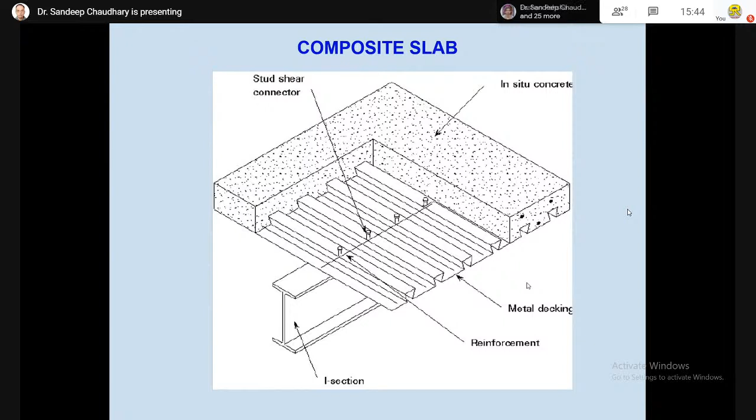Here again from another view, so we can have reinforcement also, as has been shown. In the metal decking, we can have the reinforcement. Of course, in this metal decking also, we can have certain arrangements so that there's a bit more shear connection, giving more bonding.

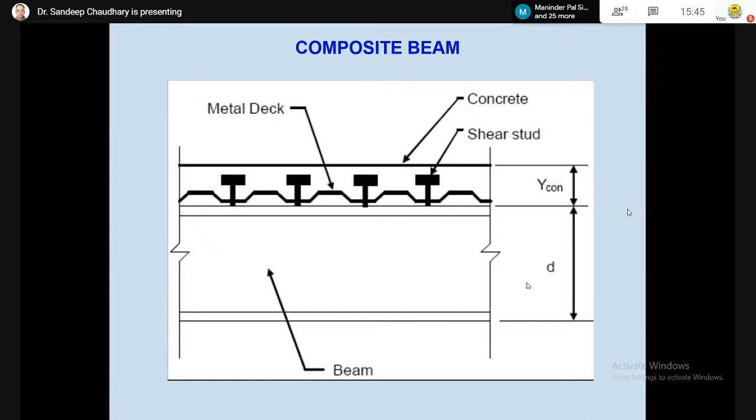So at these shear connectors, mostly called shear studs, they have a head here. The purpose of this head is that it doesn't allow the concrete to move away from the steel. It's a sort of locking arrangement. We'll be discussing that in detail later on.

We already discussed the advantages, so we're not going into that. One of the major disadvantages of composite construction is the shear connector installation. They're not conventional material - the material of this shear connector is not conventional steel. It's high strength steel, whereas conventional steel has a strength of about 250 Newton per mm square. The strength of these shear connectors is mostly more than 500 Newton per mm square, and mostly they're patented items.

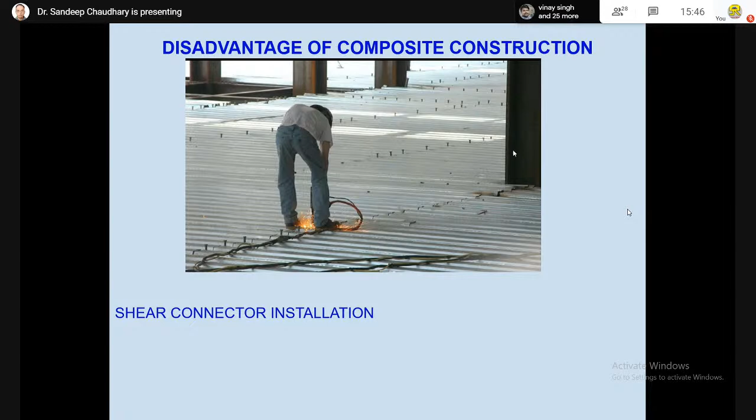The conventional welding methods also don't work here, so we need to have a separate arrangement for the welding methods.

Now this is a close-up of a composite metal decking, and you are seeing here there are certain deformed ribs. These ribs also have their own purpose - they ensure a bond between this metal deck and concrete slab. So at certain points of time, these metal decks with ribs are preferred, but in some construction sites, metal decks without ribs are also considered. They are just giving a bond which is over and above our analysis part.

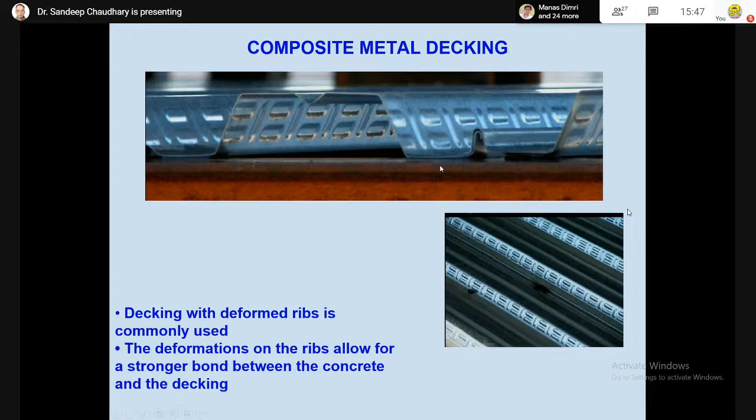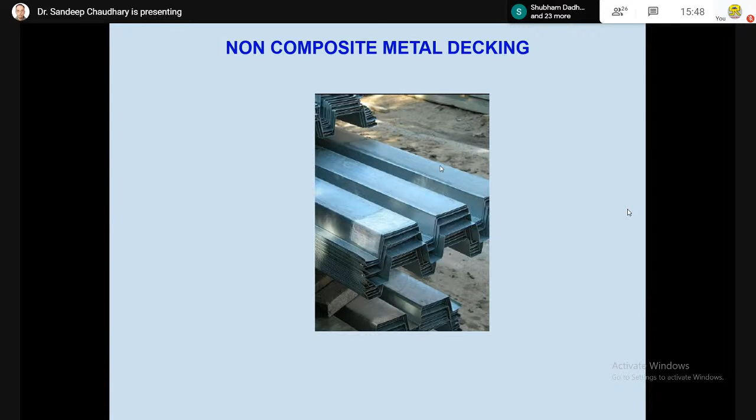So they are also sometimes called non-composite metal decking. Composite here doesn't mean the composite action between the structural steel and the concrete slab. For this definition, in this nomenclature, composite means the composite action between the profiled sheet and the concrete slab only. It is nowhere defining the complete composite action of the section.

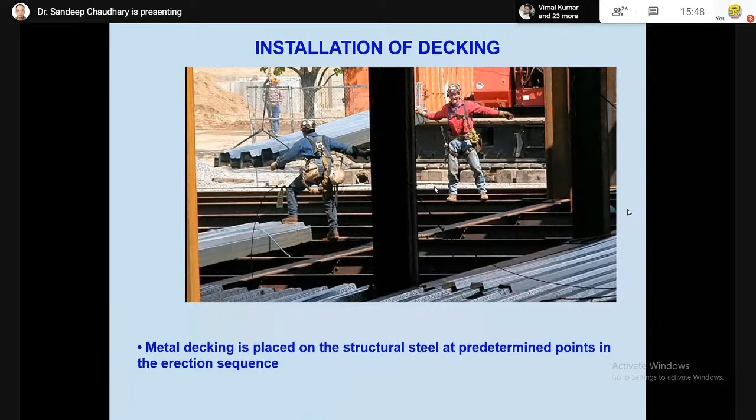Of course, it is not that their size, grade, or geometry is random. Standard codal provisions define what should be the H by D ratio - the ratio between height and diameter - what should be the maximum diameter, what should be the maximum height, and what should be the spacing between the shear connectors, both the transverse spacing and the longitudinal spacing of the shear connector.

The most popular type of shear connectors available in the market are called Nelson shear studs. Typically, their standard size is 19 mm diameter and 90 mm to 100 mm height. They create a strong bond between the steel beam and concrete floor slab.

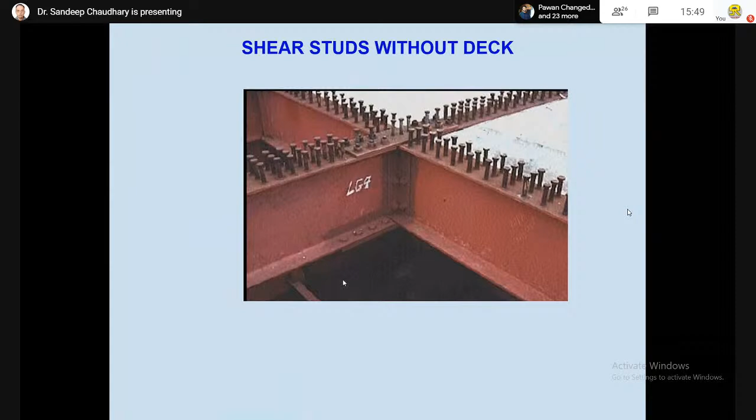So here you can see a lot of shear connectors placed very near to each other. The placement of concrete here is also an art - you have to put the concrete in a particular manner. The reason is simple: until the concrete attains its strength, the structure is not a composite structure, it is just a steel girder.

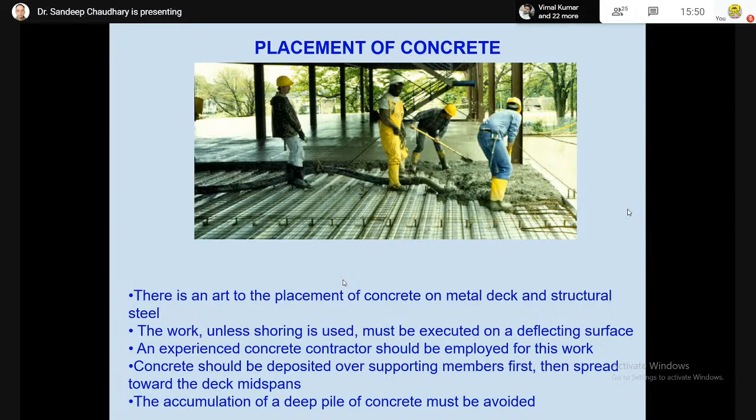If you apply a load on the bare steel girder, there will be permanent deformations due to that. So you have to apply the load in a particular fashion so that initial deformations in the bare steel girders are minimum. There are certain guidelines that the construction joint should be located over the beam or girder webs, and mid-span shoring should be placed.

There are two types of composite construction: shored construction and unshored construction. If you are going for unshored construction, the deflection will comprise of two parts: deflection due to the bare steel section and the deflection due to the composite section. Whereas if you are going for shored construction, the final deflection will be the deflection due to composite action only.

There are certain quality checks also which are specified in different codes, like you can weld two sample studs, and you can perform a bending test. We'll be considering that in the next presentation.

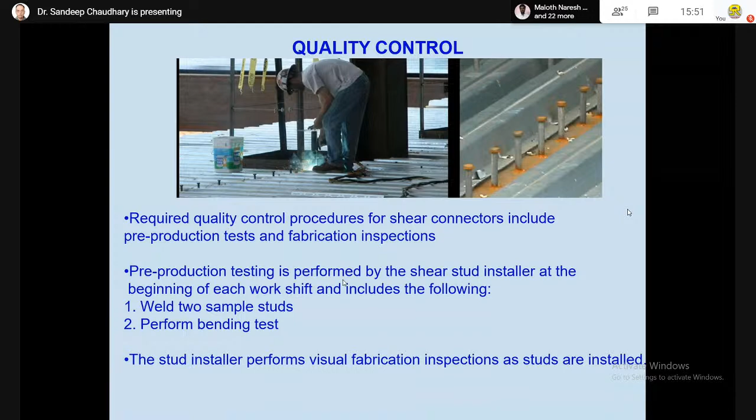The scheduling of composite construction is also very important, because until the structural members become composite members, it depends a lot. The deflection depends a lot on the manner in which you are going to apply the load on bare steel sections. So that's also quite important, and we need to look into that meticulously.

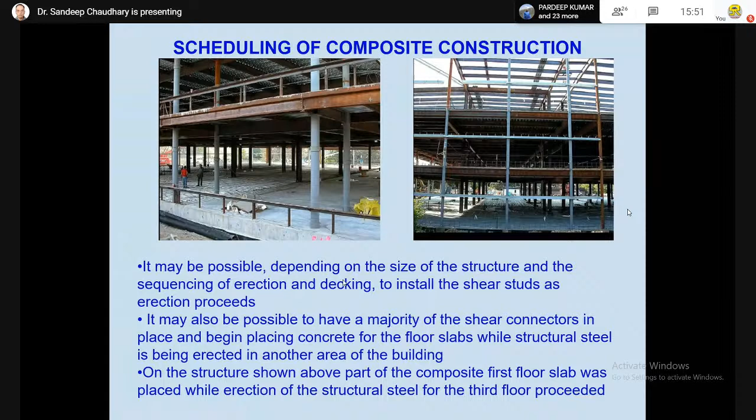Another interesting part of composite construction is cambering. It is more or less related to pre-stressing in concrete. In cambering, after the load, there's going to be certain deflection, and the steel girders are going to bend in a certain direction. So as we do in pre-stressing, the same can be done in cambering: we can provide a deflection or curvature in the opposite direction to that in which we expect the final deflections.

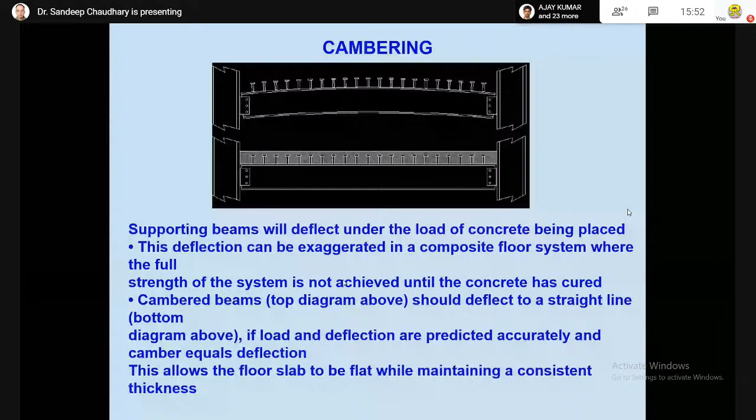This cambering can be done for a certain percentage of dead load deflection, full dead load deflection, or full dead load deflection plus certain percentage of live load deflection. The philosophy is the same as for pre-stressing, but there are certain disadvantages of cambering also, since it's not as simple as it looks in photographs or on slides. There's a certain complexity involved in detailing, fabrication, and fit-up associated with moment connections, and mostly we should not use cambers in moment connected beams.

Beams with simple framing connections may be cambered because the end rotational resistance there is quite small as compared to that of moment connection.

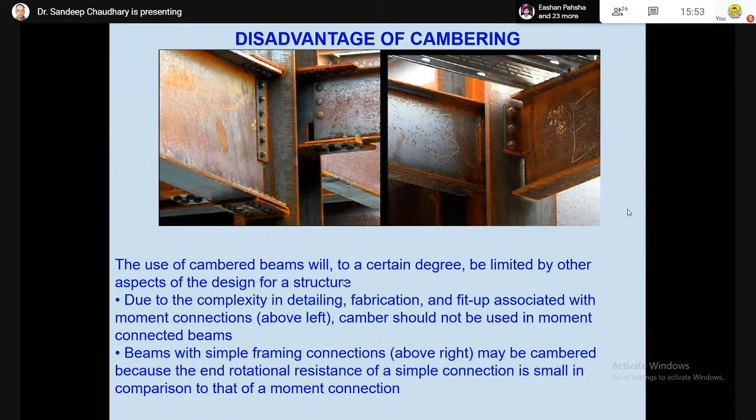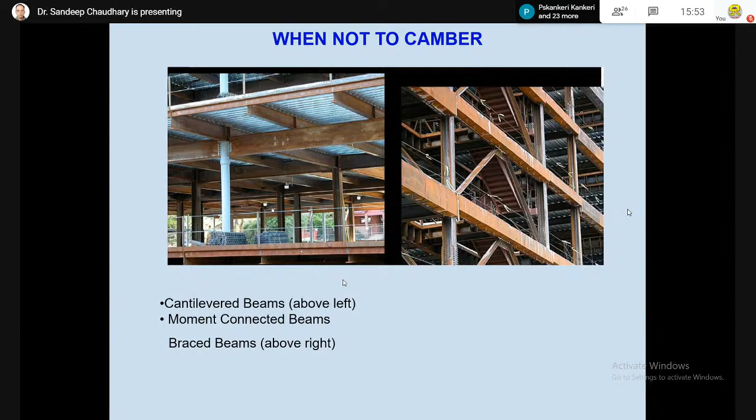The next question is when to camber. We can camber girder beams, members with uniform cross sections, filler beams, or composite floor beams. When should we not camber? Cantilevered beams should not be cambered, moment connected beams should not be cambered, and braced beams also should not be cambered. As we are very particular in pre-stressing of concrete beams, going for it in certain situations only, the same needs to be done for composite construction.

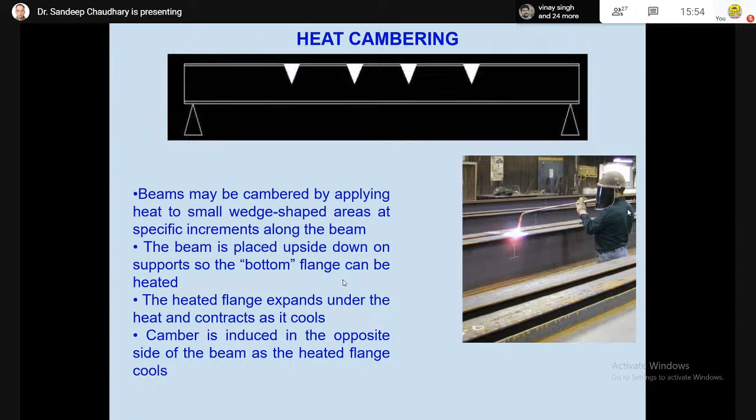You are seeing that the part which was heated is on the downside. During the camber, it was on the upper side because it was put in upside down manner. But finally it's going to be on the lower side, and that is a concave-down orientation.

Along with heat cambering, there's another option of cold cambering. These are more widely used and generally more economical than heat cambering. Here you have to mount the beams on a frame and then apply force from rams to bend the beam to create the cambers.

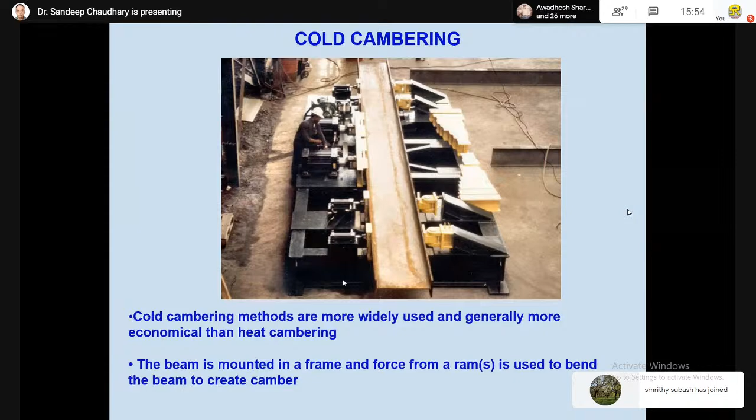Then there's a natural mill camber also, because when you'll be transporting the steel girders from the factory to the construction site, there will be a slight camber in the beam because it's taking the load of the beams lying on it.

So you can take into account or take advantage of that natural mill camber, but that should be at least 75% of the specified camber. Otherwise, you have to go for further cambering.

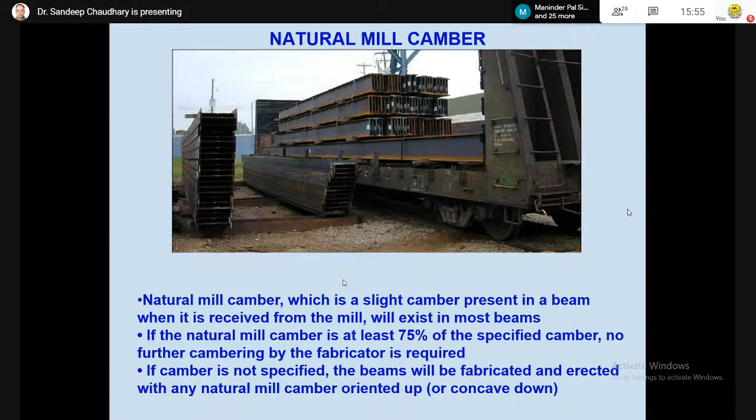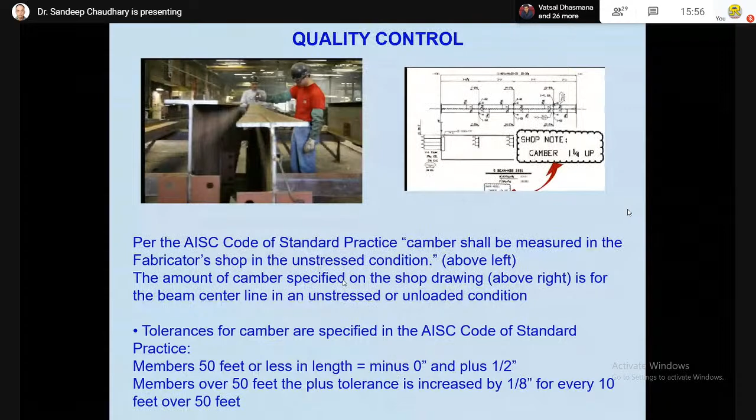It may be noted that Indian standards are still way behind the AISC Code of Standard Practice or Euro codes. Of course, recently certain codes have been introduced for composite construction, but that sort of detailing is still missing in Indian standards.

Then we have to see the cost of cambering also, and that has to be compared with the additional concrete due to ponding. What is this additional concrete due to ponding? Actually, if we do not do the initial cambering. Then when we'll be placing the concrete on the bare steel section, the steel will bend and that will cause a curvature in the concrete slab. That means the effective depth of the concrete which has to be filled on the slab will increase a little bit by the amount of deflection into that area. So that is called ponding, additional concrete due to ponding.

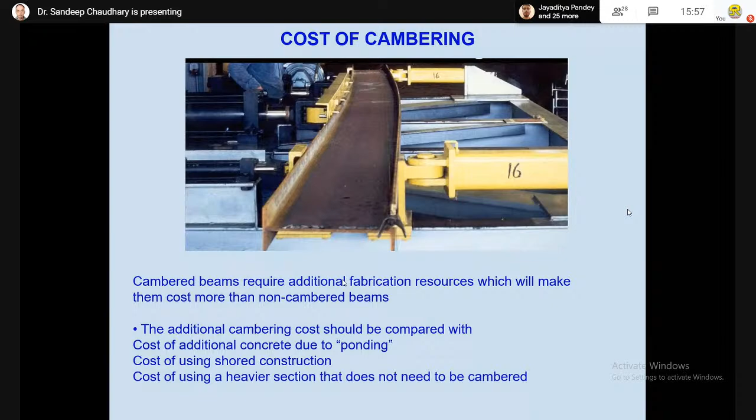So you have to see the additional concrete due to ponding versus the cost of using shored construction, versus the cost of using a heavier section that does not need to be cambered. And then you have to calculate and see which is beneficial for you. At times, it may happen that you can afford the ponding. At times, it may happen you can afford a shored construction. At times, it may happen that cambering is a cheaper option.

Now, just to get rid of all these problems which arise due to casting of concrete on site, that is in-situ casting of concrete, people have moved ahead and gone for the prefabricated concrete slab. So what's done in prefabricated concrete slab is we do have prefabricated concrete slabs of standard shapes and sizes.

The only issue is when we are going to place the prefabricated concrete slabs on the steel girders, there has to be a provision for the shear studs. We should have a certain provision for shear studs. So we have to have certain holes already for the shear studs in these precast slabs, or the precast slabs can be of such size that they just fit into that location only. And then the remaining portion of the holes, once these shear studs take their place in those holes, they have to be filled by non-shrink grout. So people are also going for composite beams with hollow core slabs.

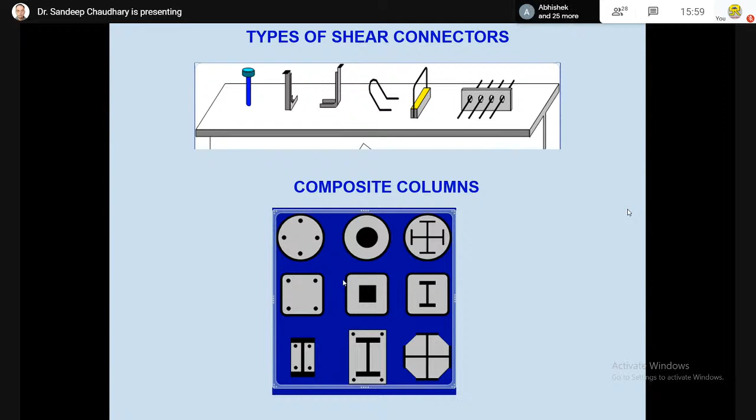And now there are different types of shear connectors. We'll come down to that again as I've discussed in another presentation. The most popular is the headed shear stud. Then you are seeing certain type of C-type shear studs, another type of shear studs. In all the shear studs, you will see that somehow effort has been made to ensure that there should not be a slippage between the steel girder and the concrete slab, that is, under shear, the steel girder and concrete slab should not move away.

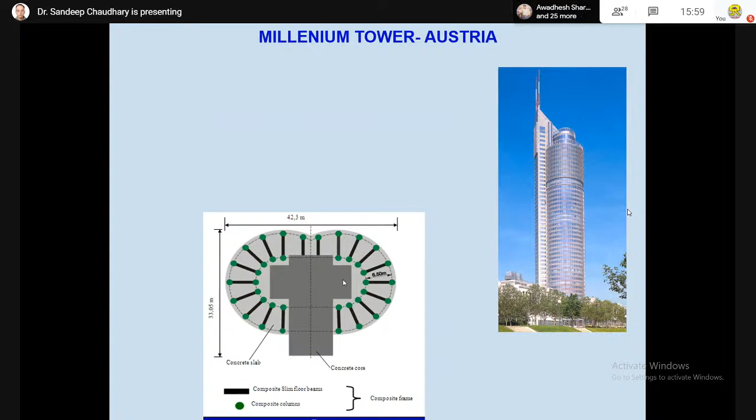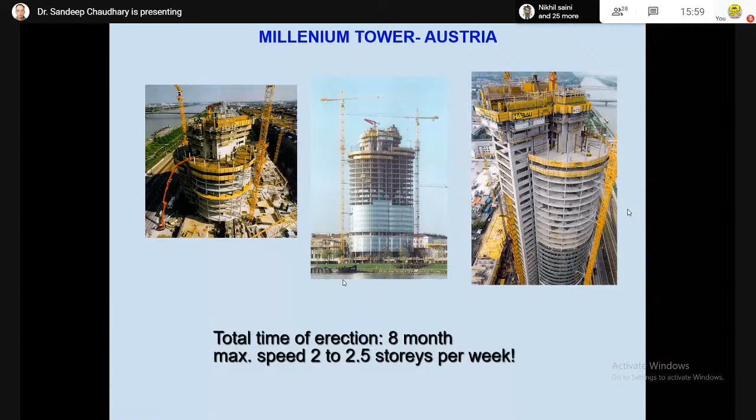Some of the classical examples of composite construction is Millennium Tower, Austria, a very big tower. It's a 55-story building, and what is important is that the time of erection was just 8 months. So if you use composite construction, then you can erect up to 55 stories in just 8 months. This is the importance of showing this slide. So the maximum speed was about 2 to 2.5 stories per week, which is almost impossible when we go with conventional concrete construction. That's why this composite construction is becoming popular.

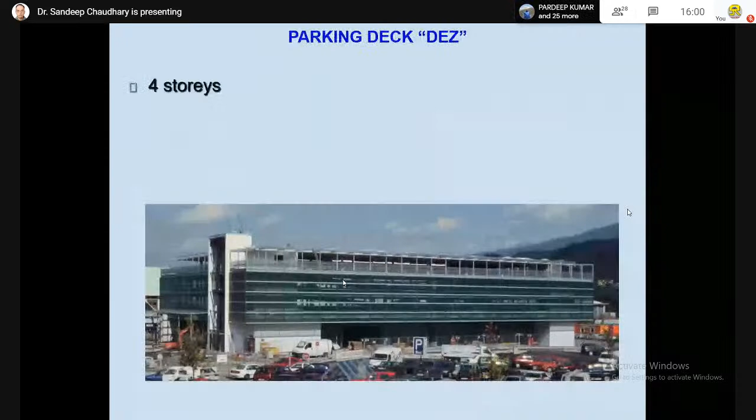Then another is Citibank, and then a parking deck. So different types of composite constructions are being used. Here, what is interesting is that there's erection of composite columns over 2 stories. These columns are composite columns in the sense that outside there's a steel section, but inside they're filled with concrete.

That's also an interesting method of going for composite construction. You can have a small thickness of prefabricated slab. The advantage with these prefabricated slabs is you get a platform for working on it, so you don't need shoring and you don't need scaffolding. The same prefabricated slab can be used for that purpose.

Here the headed stud size was 22 mm. The standard size worldwide is mostly 18 mm to 22 mm.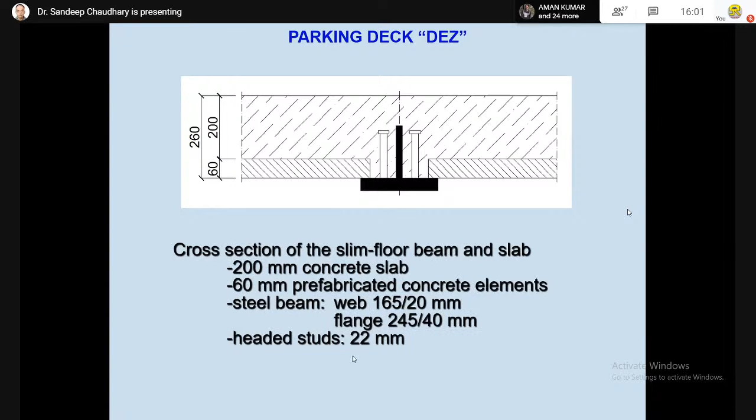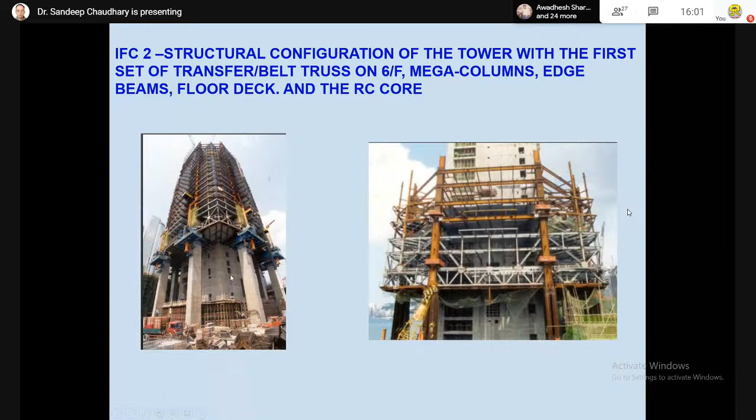So these are some other examples. You can see here another type of composite construction. Inside there's a concrete core, and then there are composite beams, and outside also there are concrete columns. This concrete core inside is connected through steel girders, which will be made composite with time with the outer core. So there's a connection of this steel frame to the inner core.

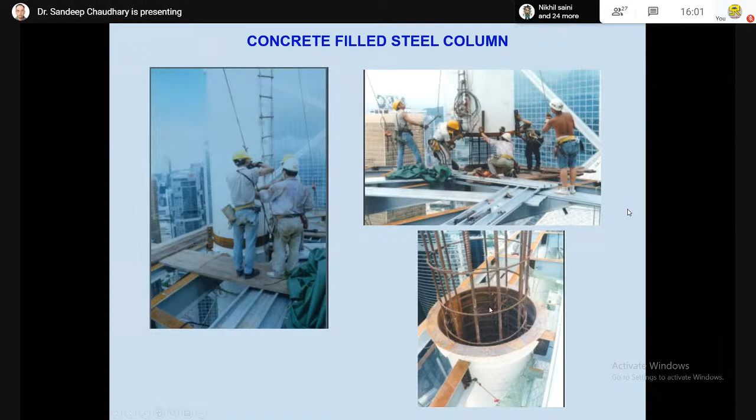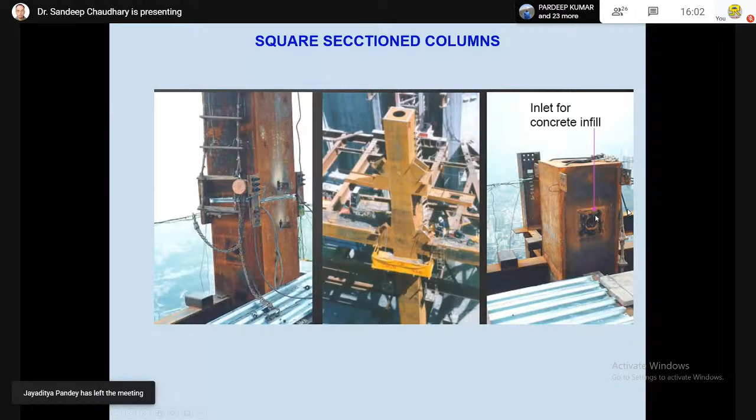This is another type of composite construction: concrete filled steel column. You can see these steel columns on the outside periphery, but inside it is filled by concrete. It is just the opposite of our conventional concrete type of columns. You can have squared section columns also. Here you can see there's an inlet for concrete fill. So again, this is a composite column construction.

You can see here there are a lot of shear studs protruding out, because when we cast the concrete around this, these shear studs will ensure good composite action between the steel section and concrete section. Of course, here it's for a column, but the purpose of shear connection is the same.

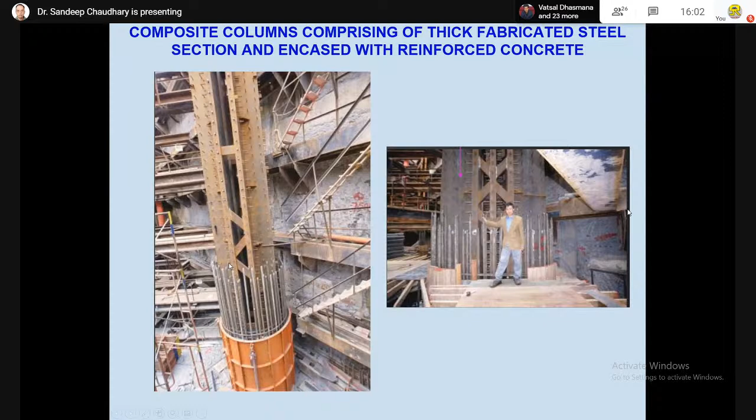So you can see here, inside we have a steel section, then we'll have concreting. A steel section embedded in a concrete column is again another type of composite section with a lot of shear studs. You can see a lot of shear studs here.

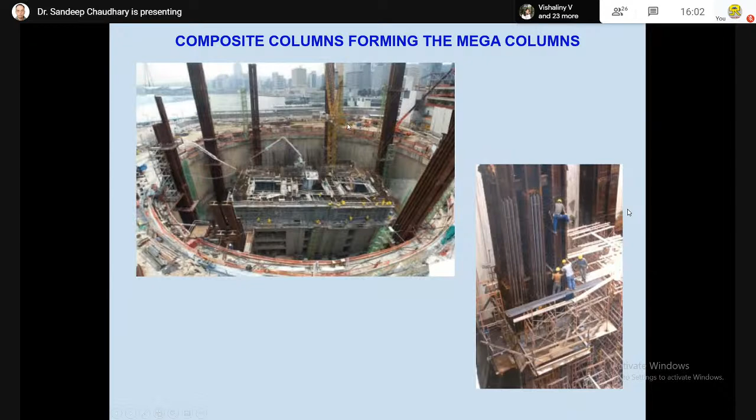Here these different composite columns, there are a lot of composite columns, they will form a mega column. You can see here we are embedding these composite columns in the core wall. So different types of composite constructions have been shown here.

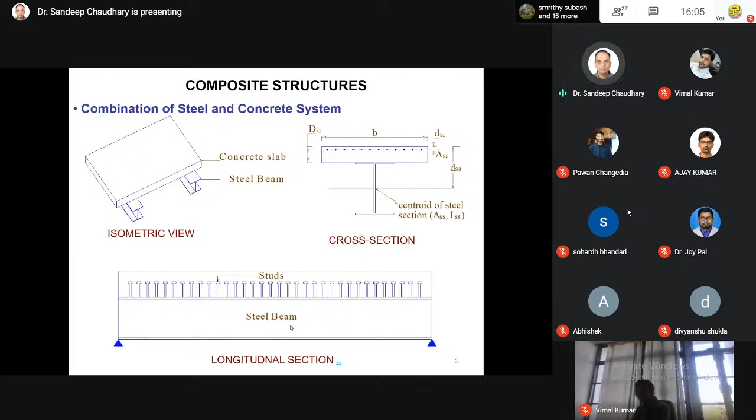So the tensile part will be taken care of by the steel beam, and the compressive portion will be taken by the concrete slab. To talk about service load behavior of such structures, it's not always the idealistic case.

If we go for continuous beams, then there will be certain hogging moments at the ends. In the portion of hogging moment, the reverse will happen: the upper portion will come in tension and the lower portion will come in compression. That means the concrete will now be subjected to tensile forces in the hogging moment region.

And if those tensile forces cause a tensile stress which is more than the tensile strength of the concrete, then the concrete is going to fail, and the cross section is going to become a simple steel cross section, because the concrete will fail. So if you see the sections longitudinally, the major portion will be a composite cross section, but in the hogging regions, the section may reduce to just a steel section because of higher tensile stresses.

Then there are certain time-dependent effects of creep and shrinkage which cause progressive cracking. So along with cracking, these creep and shrinkage effects add to the complexity of the behavior of composite structures.

On top of that, there's the flexibility and type of shear connections, because we cannot assume that the shear connections are so rigid that they'll always ensure 100% composite action. Ultimately these shear connections are also made of steel, and even if it is high grade steel, there's always going to be certain deformation in the steel section. So we cannot guarantee absolutely 100% composite action.

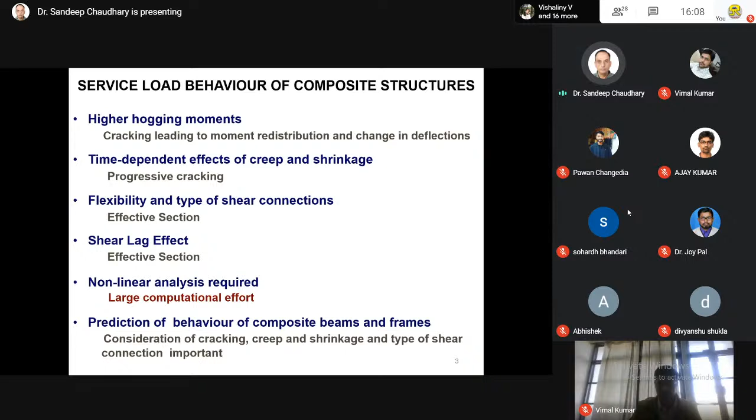So this leads us forcefully to nonlinear analysis. Of course, nonlinear analysis requires a large computational effort. And the prediction of behavior of composite beams and frames, to sum up this slide, becomes quite difficult because we have to consider cracking, creep, shrinkage, types of shear connections, etc.

For that, some time back, we tried to propose a hybrid procedure, which is analytical at elemental level and numerical at structural level, to avoid the complexities of finite element analysis. And also, we know that finite element analysis cannot be performed in day-to-day life by field engineers.

So just to give a simplified solution, we assumed to begin with that the shear connectors are completely rigid, and we tried to develop certain solutions which can take into account cracking, creep, shrinkage, and other aspects without considering the flexibility of the shear connector. We try to develop certain elements which are analytical at the elemental level and numerical at the structural level.

So what we try to do is split the total curvature into instantaneous curvature, and then instantaneous curvature was further split into instantaneous curvature due to moment and instantaneous curvature due to axial force.

Similarly, strain was split into instantaneous strain plus time-dependent strain. Then instantaneous strain was further split into instantaneous strain due to moment, instantaneous strain due to force, etc. So different small components were made for these time-dependent curvatures, strains, and stresses.

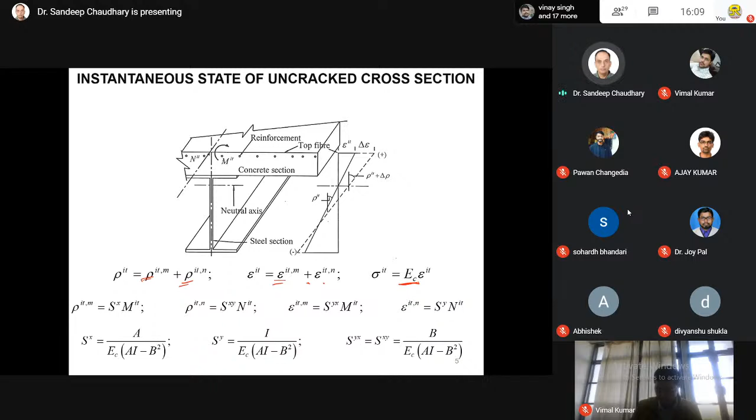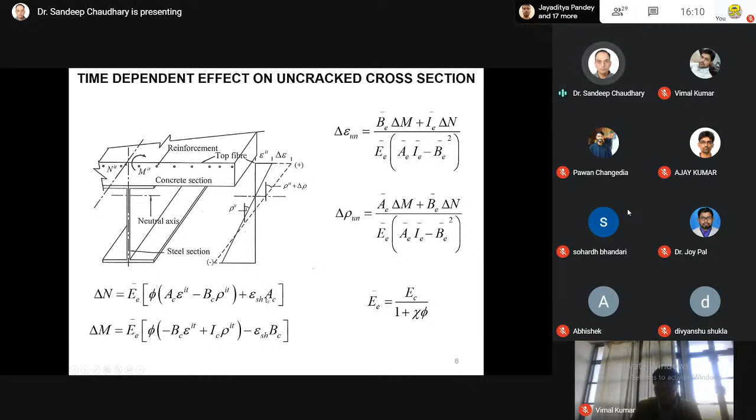At the elemental level, or rather at the cross-sectional level, we try to develop certain equations which can directly take into account the effect of creep and shrinkage. Here, phi denotes the effect of creep, phi is the creep coefficient, and epsilon sh denotes the shrinkage strain. So the formulation was developed and the analysis was done in two parts.

In the first part, instantaneous analysis was carried out. In the second part, time-dependent analysis was carried out.

Another interesting aspect when solving these composite structures is that it becomes an iterative procedure even at the instantaneous part. The reason is, initially you assume there is no cracking, but once you get certain moments, you will know some part of the concrete is going to crack. Then you have to carry out your analysis assuming those crack lengths. But once you go with those crack lengths, you will get another set of crack lengths after the complete analysis. So there's a lot of iteration involved in the instantaneous analysis.

And in time-dependent analysis, it so happens that these creep and shrinkage phenomena keep on changing the strains and the stresses in the sections.

That is, the crack lengths keep on changing as those portions where the tensile strength is lacking, the tensile stress keeps on changing and the crack lengths will keep on changing. So here, a cracked span length beam element along with closed form expressions was proposed. This is a typical span length beam element of a composite girder where the middle portion will be uncracked and the outer portions will be cracked.

So you have to find out, like say, if you talk about the stiffness of a normal flexural member, then we say 6EI upon L square, 12EI upon L cube, 4EI upon L, so on and so forth. But they are applicable only when EI is constant throughout the cross section. But here, unfortunately, EI is changing with the cross section along the longitudinal section. So different integrations have to be performed to find out the flexural stiffness of such cracked sections.

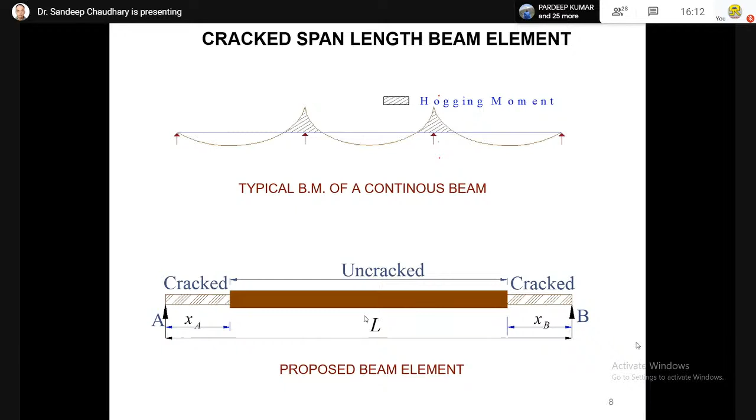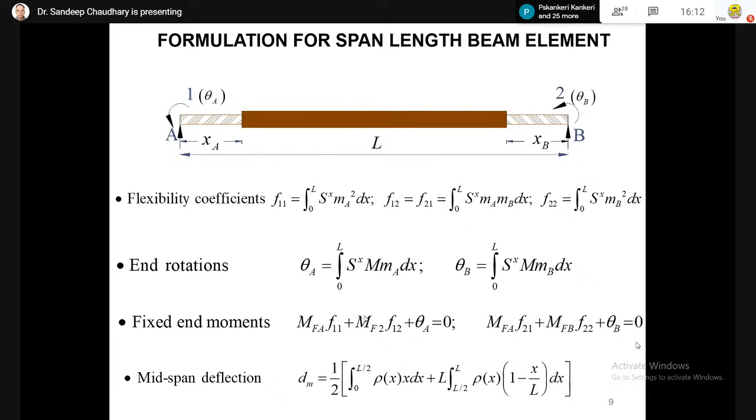So again, certain integrations were performed, and based on those crack lengths, we tried to develop certain flexibility coefficients and rotation, fixed end moments, and mid-span deflections.

Similarly, for time, you are seeing here with the time, the crack length will change. So different time intervals were considered, typically 20 time intervals. And we said that, of course, for a time interval, the crack length can be assumed to be constant. Of course, the crack length will change, or rather can change, at each and every moment of time. But to begin with, it was assumed.

Interestingly, if the crack lengths are changing, then the moment redistribution will take place, and again, new moments will be developed. So a complex history of moments has to be taken into account. So that was also considered.

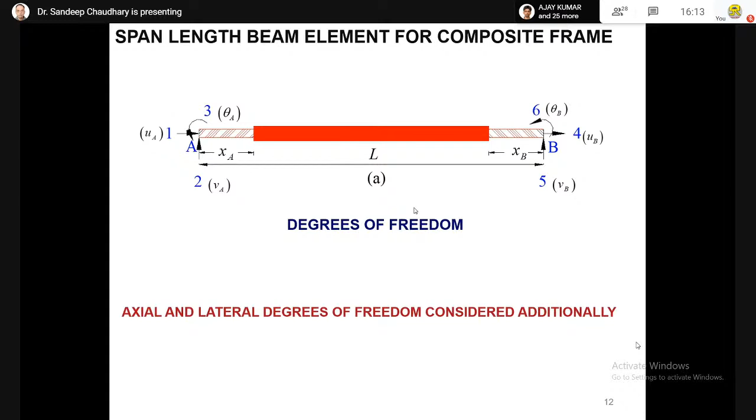And if you see a typical composite frame element, it will be a 6-degree frame element as compared to the composite beam element, which is a 2-degree frame element. So here, because if you're talking about frames, you have to consider axial and lateral degrees. So the process was extended there also. And of course, it becomes more complicated here because along with additional moments, additional axial forces are also developed.

The procedure was validated with the finite element software Abaqus. And we know that normally the computational effort required to solve any structure is roughly proportional to the square of the degrees of freedom. So if we solve such a type of composite frame by finite element software Abaqus, typically we'll need about 1500 degrees of freedom, whereas from the proposed procedure we'll need only 12 degrees of freedom.

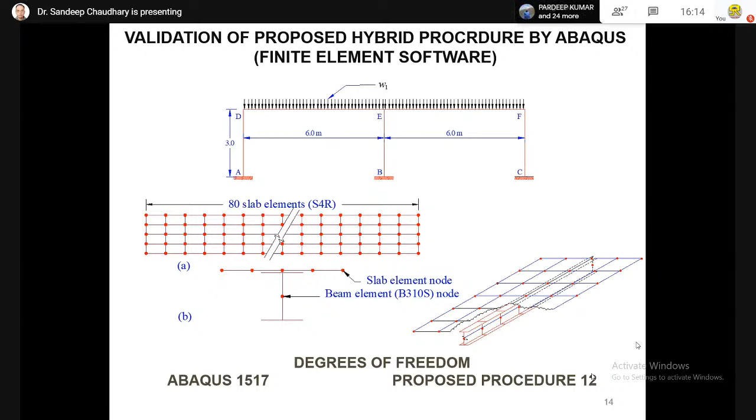So that's about a 100 times difference in the degrees of freedom. And if we convert that to computational effort, that goes up to 10,000 times. So you can reduce your computational effort by at least 1,000 times by going with this procedure, and you will get more or less the same results. And these are the validation results where we could match the experimental results.

Then this modification can be done later on for concrete girders also, concrete beams also, if you wish. Here you can consider the cracking in the middle portion also, and you can develop the flexibility coefficients, etc.

Coming down, then once we develop the complete knowledge of this, for composite structures with rigidly connected shear studs, we try to enter a new domain. That is, we try to see the effect of the flexibility of the shear connection. And not only that, we also try to introduce a new type of shear connection, an epoxy bonded connection. Let's see what we have done.

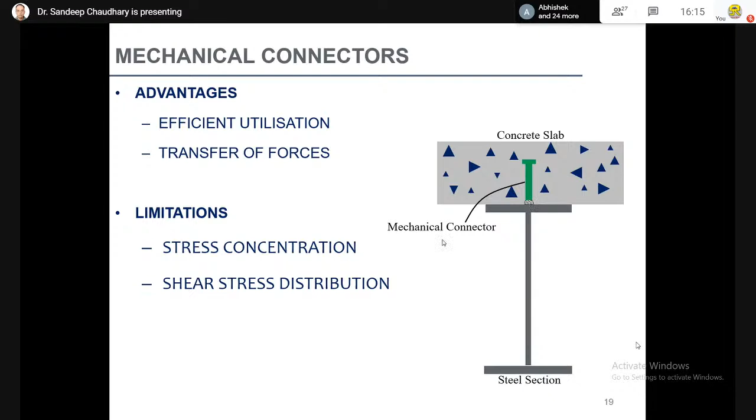If we talk about the mechanical connection, then a typical mechanical connector looks like this. The advantages are there's efficient utilization and there's a transfer of forces. Limitations are there is a cause of stress concentration because they will be at certain locations only, and the entire shear force will be concentrated at those locations. So there will be a stress concentration which can cause cracking of concrete, and of course, there will be a lot of shear stress distribution in those regions.

If we can somehow replace this mechanical connector with an adhesive bond, then we can overcome this limitation of stress concentration. So if we put a layer of structural adhesive here, it is more or less like putting a layer of gum or glue or Fevicol between two surfaces. Then there will be ease of construction, uniform stress transfer because you can put this adhesive layer all along the longitudinal section, and there will be quality assurance. Of course, there are certain limitations in that they can be susceptible to the environment because epoxies are normally susceptible to environment.

You have to also ensure the surface condition is very good. The reason is because when you use these epoxy adhesives, the thickness will be hardly 5mm, not even more than that. If there are undulations in your surfaces up to the range of 3 to 4mm or 5mm, then there is no purpose in using these adhesives because there will not be a proper bond. So that has to be ensured.

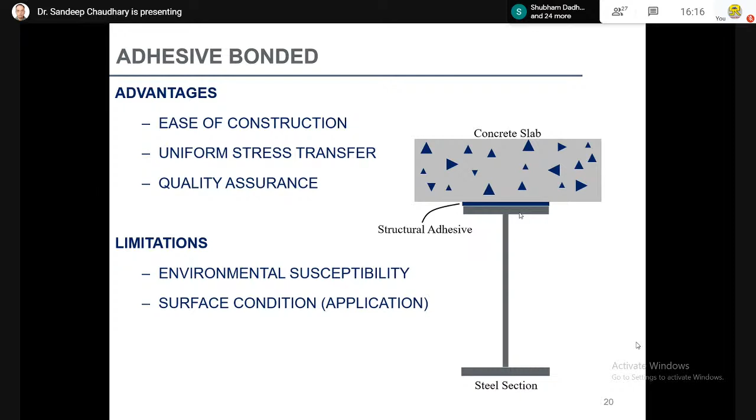This is the limitation. And of course, to check the strength of the shear connections, whether epoxy bonded or headed shear stud, there is a standard test called the push-out test arrangement, specified in Eurocode as well as Indian standard codes. What is done here is these concrete slabs are connected to the steel girder on both sides, with shear studs or shear connections on both sides.

Then a force is applied on this steel section, so it tries to move down, whereas the concrete slabs are firmly placed on the surface and restrain the steel section from moving down. That introduces shear stresses between the steel section and the concrete slab. The load at which the shear connection is not able to resist that shear stress or shear force, arising due to the movement of the steel girder through the concrete slabs, tells us the total load carrying capacity of the shear connections.

Of course, say you are using two shear connections and you have a load P, and the failure is at P load, then each shear connection will have a strength of P by 2 load. And if it's an epoxy adhesive bonding, then P divided by the bonded area will give us the epoxy strength.

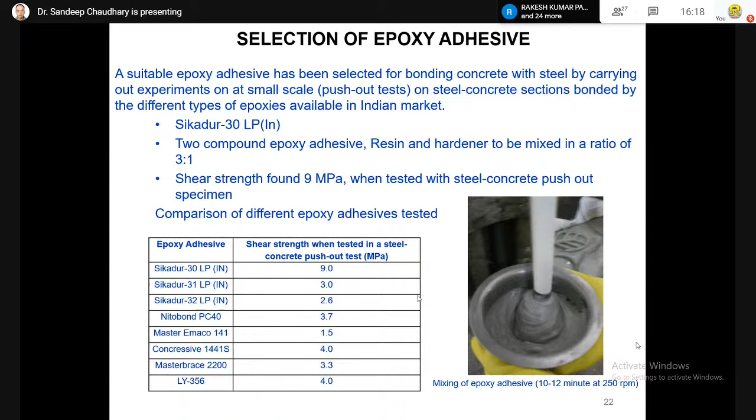Now to check the epoxy, what is very important is there's no standard epoxy as such available in the market for the composite action of structural steel and concrete slab. So a lot of epoxies were tried, different epoxies from different manufacturers, and even from the same manufacturer different varieties of epoxy. The shear strength was checked for different types of epoxies.

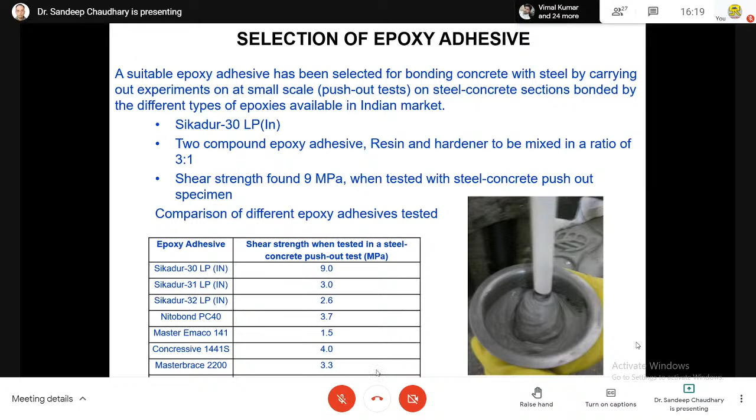Finally, we could freeze on one epoxy, Sikadur-30, which had a strength of 9 MPa. So we worked upon that epoxy later on. Of course, here the mixing process is also shown - you have to mix epoxy for 10 to 12 minutes at 250 RPM.

To go for an actual strength evaluation, to actually see what's happening, we installed a complete load frame, a full scale load frame. It was a movable load frame arrangement where, because a heavy load was about to come, we tried to cast a complete bridge. We used under-reamed piles also, made a load frame structure base, and a movable load frame was placed over there with loading arrangement to see what is happening actually at full scale.

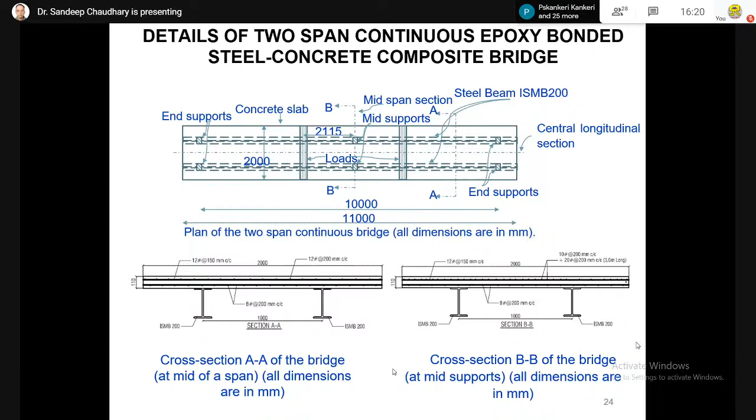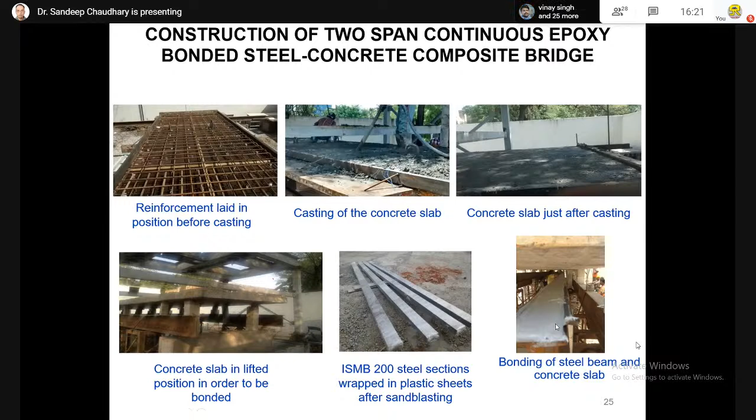In the last figure, you are seeing the bonding of steel beam and concrete slab going on. The concrete slab is now being lowered, and epoxy has already been placed on the steel section. Once the concrete touches that, there will be a perfect bonding between the steel girder and concrete slab.

Now there's a deflected profile, not along the horizontal line. There's so much load that the steel girder or composite section is now showing a particular deflection. Initially we observed cracks in the concrete at the mid support. Of course, before we reached the ultimate load, there was a failure of welding at mid support.

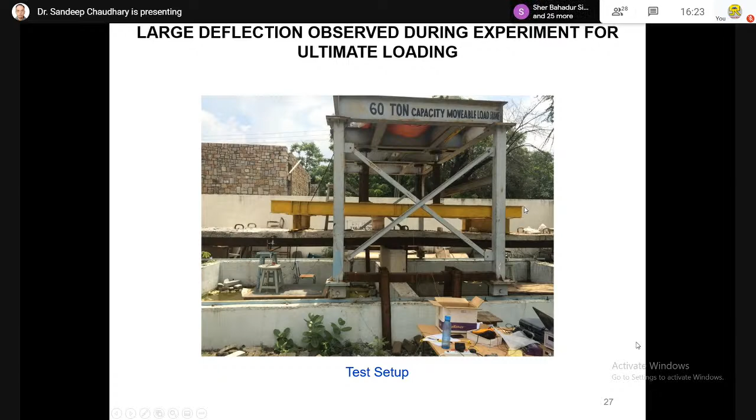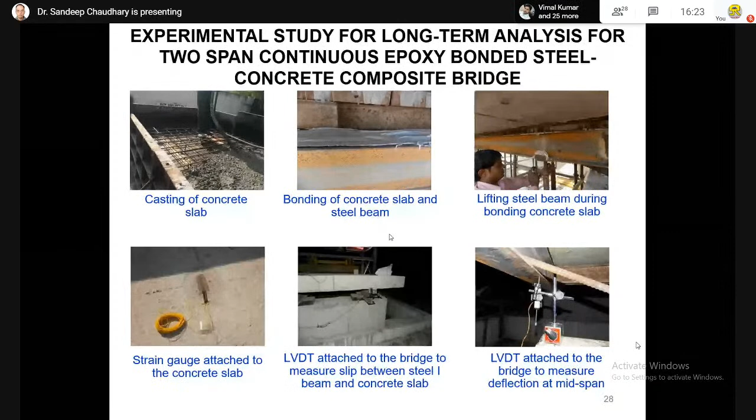So for long-term analysis, again, the next series of casting was done. And here, this time, it was ensured to have proper welding. The strain gauges were put, LVDTs were put for long-term measurement. And of course, finite element models were also developed, first for short-term analysis.

The experiments and the finite element results were compared first with some other experimental results so that we are sure of our finite element results, and then we can compare it with our experimental results. Results were available in literature for experiments performed by Bouazaoui et al. So we modeled that beam and tried to see what are our results versus his results. Our finite element results were matching with his experimental results.

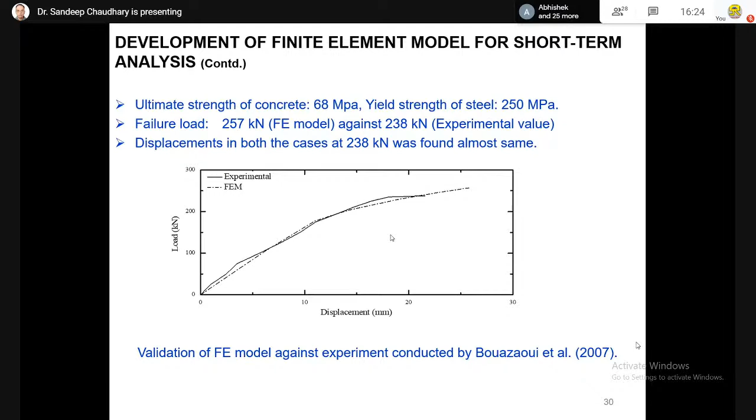And then we developed it for long term also. Before that, shear strength of epoxy adhesive was ensured, put as 9 MPa. And then this lambda, K, beta, etc., these are the properties which you need to put in Abaqus for the Drucker-Prager model. Ultimate strength of concrete, what we got in the lab, was put, along with yield strength of steel, what was supplied to us.

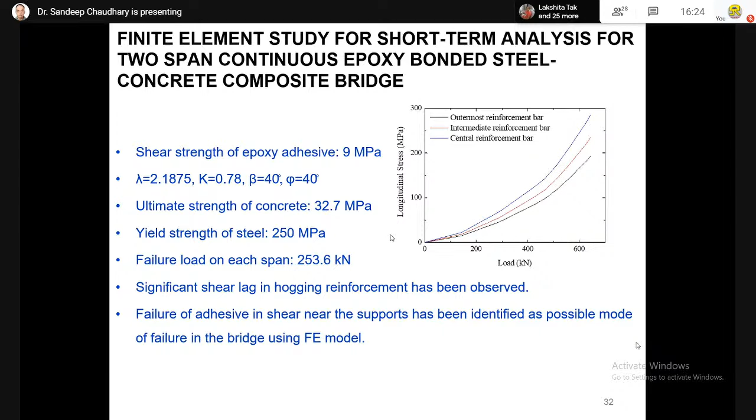Then in the long-term model, again, epoxy was modeled as C3D8R. The Drucker-Prager model was adopted. And to check the actual strength of the epoxy, a single lap shear specimen was used, and we tested that in laboratory with a small UTM. And here you can see the experimental and the FE results.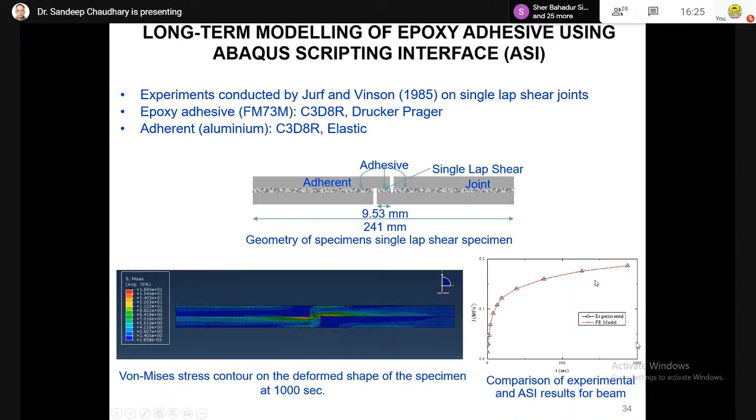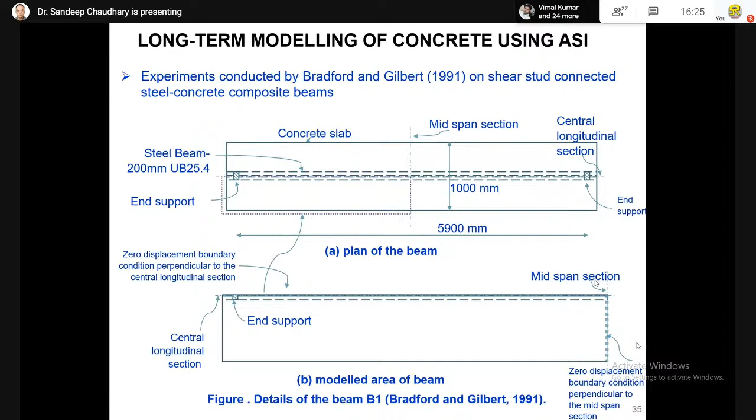They're almost matching in this case. There were certain scripts also which were written. The reason is that in Abaqus, there's an inherent disadvantage that you cannot use cracking and viscoelasticity, that is cracking and creep phenomena, together. So to take these two phenomena together, you have to use some scripts. Those scripts were written, and here you are seeing long-term results, even up to 250 days, more or less in agreement.

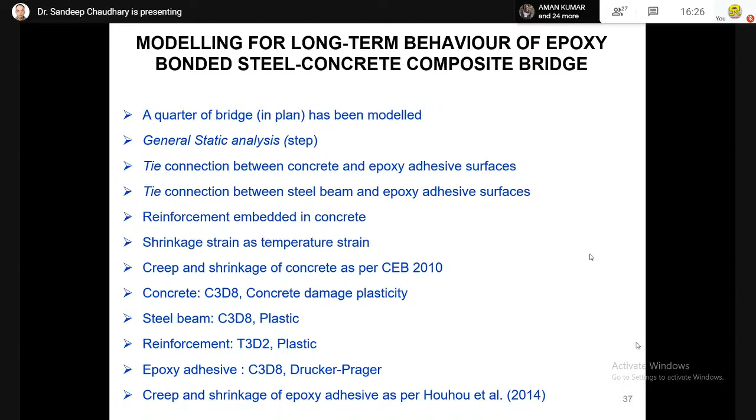We also tried to see the effect of adhesive thickness, whether it affects the behavior of composite action. So we got some interesting results: when we used a 2 mm thick layer, we saw a pure adhesion failure using the push out test, from the steel concrete, the epoxy steel surface. So there's a pure adhesion failure here.

But when we used a 3 mm layer, when we increased the thickness of the epoxy, instead of a pure adhesion failure, we observed intra-layer slippage. So that tells us that the thickness of the epoxy layer is also quite important while defining the behavior of composite action, or the composite behavior of epoxy bonded sections.

So the behavior is changing from adhesion failure to intra-layer slippage when we are moving from 2 mm to 3 mm thick layer. When we moved to 4 mm thick layer, these intra-layer slippages were again predominant. When we further increased the thickness of epoxy layer to 5 mm, there were intra-layer cracks observed. So that also tells that it's important to define an optimum thickness of epoxy for bonding of steel and concrete.

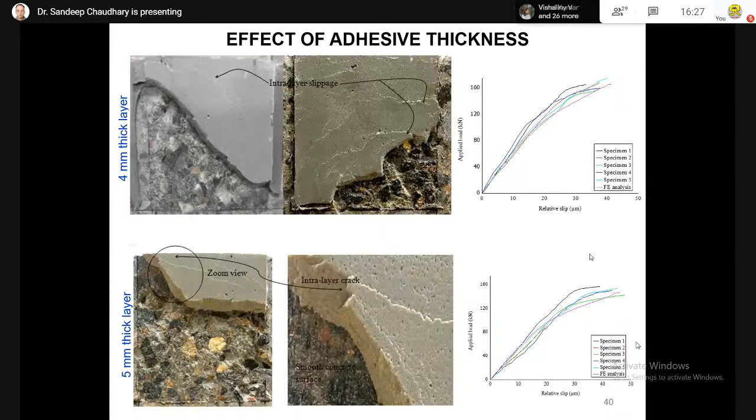So different types of reinforcement patterns were used in the concrete slabs: single layered, double layered with 100 mm spacing, double layered with 80 mm case, 60 mm case, even triple layered reinforcement cases. You can see the ultimate slip is changing. If you're moving from single layered case where the ultimate slip is up to 15 mm, in triple layered case the ultimate slip is only 7.8 mm. So there's a huge difference between the single layered and triple layered.

Similarly, the average ultimate bearing load in single layered was 136 kilonewton. That load carrying capacity increased from 136 kilonewton to 170 kilonewton when we moved to triple layer. But it's not always that more layers give more ultimate bearing. In fact, we observed better ultimate bearing in double layered with closely spaced spacing of 60 mm, which was 173 kilonewton. So the reinforcement in the concrete slab also governs the load carrying capacity of these shear studs, which is mostly neglected in the codes and by researchers.

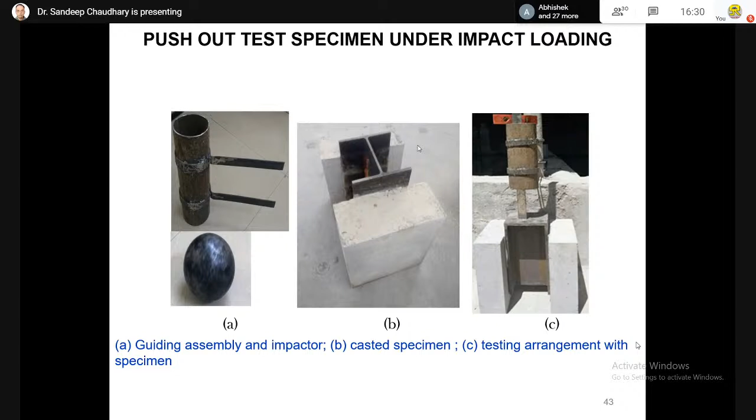We also tried to see the effect of impact loading, or the behavior of different types of shear connections - headed shear connection and epoxy bonded shear connection - on the impact resistance or impact load carrying capacity of these composite sections. We used a guiding assembly and an impactor, a heavy steel ball, and figure B shows a casted specimen. Figure C shows the testing arrangement and how the load is being put on the specimen.

So if you see the connection failure in case of the adhesive bonded specimen, initially there was a crack initiation near the epoxy concrete interface, for that particular case at 39 blows. That crack led to final failure and consequent separation near the interface after 43 blows. So within 4 blows there was a final failure, and the concrete layer separated from each other.

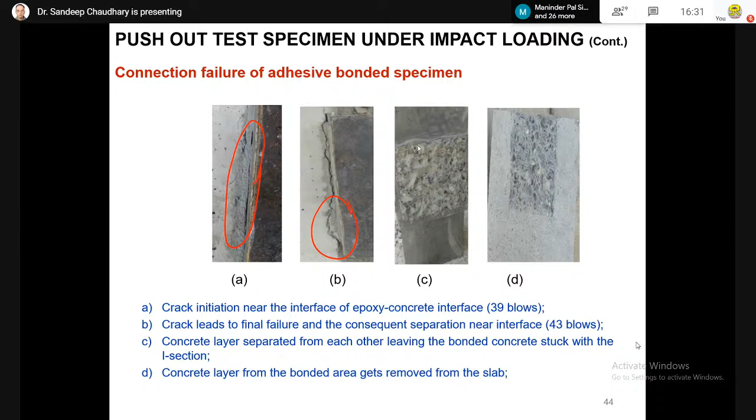That means the bonded concrete was still stuck with the I-section, so as such the epoxy itself did not fail. The failure was within the concrete itself, and then the concrete layer from the bonded area gets removed from the slab with time.

What started happening at 39 blows in the epoxy case started happening at 27 blows here, and then cracking in the concrete surrounded by the stud was at 60 blows. This gives an important indication: though the initial failure started earlier, the final failure which was at 43 blows for epoxy is at 60 blows for studs. That means in terms of ductility, headed studs perform better, while for just initial failure, epoxy bonded connection performs better.

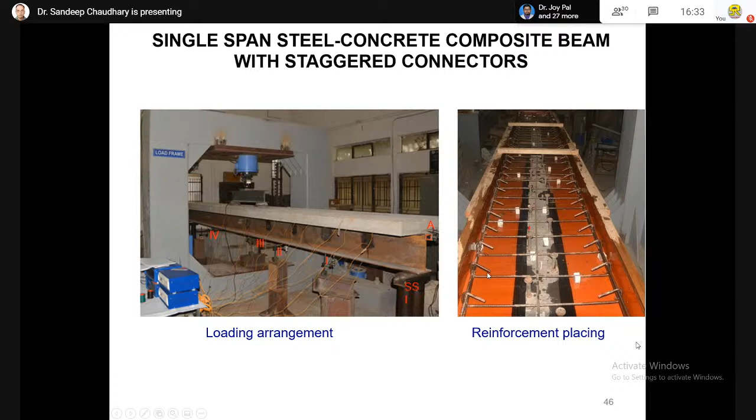And of course, we found certain differences in the behavior when the connections were made staggered instead of in a single line. We also tried to develop a finite element model for composite structures with headed shear studs to see its behavior.

This is much more difficult than the finite element model of epoxy bonded connection, because epoxy can be modeled as a layer. But here, because the headed shear stud has a complex geometry, you have to go for 3D modeling. A solid 3D deformable concrete slab also has to be created, because if you are modeling the shear stud as 3D, you have to model other parts mostly as 3D as well.

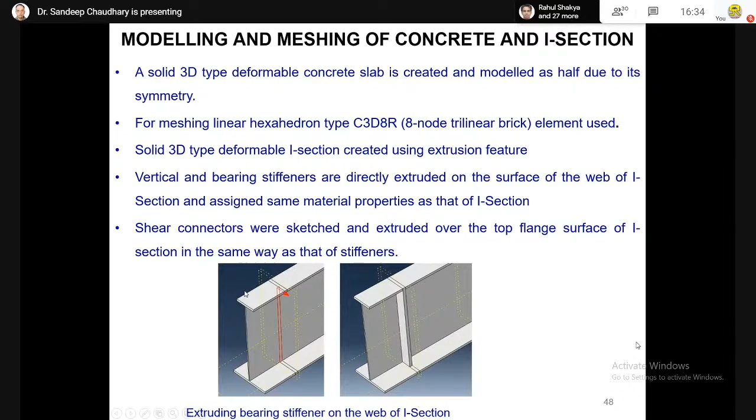So we used a 3D model to model a composite section with headed shear studs. Those who know finite element modeling know the shear connectors cannot be made directly with such geometry, so they were sketched and extruded over the top flange of the surface, and this is how these studs were formed.

Circular geometry also leads to creation of many disproportional elements, so two diametrical cuts were put, and then a small circular cut was put. A lot of manipulations in the geometry were done, and then we could arrive at the final section we were needing.

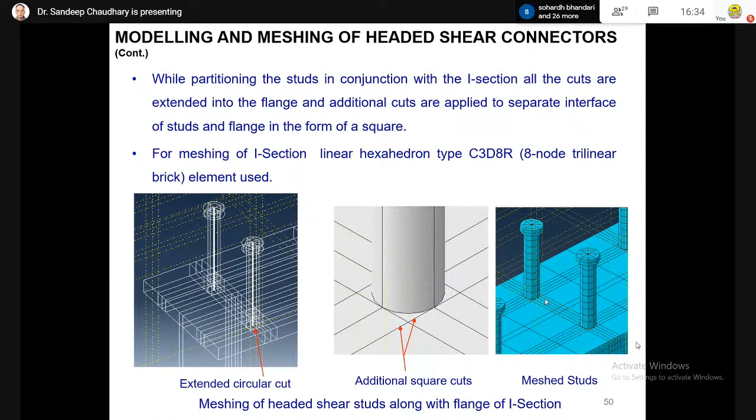These show the extended circular cuts and square cuts, and finally we were able to model these headed shear studs, which of course requires a lot of time. But now we have a finite element model for epoxy bonded connections as well as for headed connections, and we can apply constraints etc. as we do in regular finite element modeling.

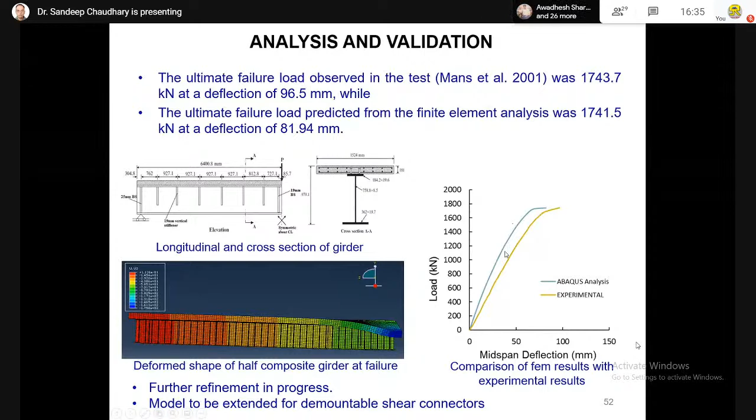The finite element model was validated with certain experimental results available in the literature, because we performed full scale experiments only on epoxy bonded connections, not on headed connections. For headed connections, we used just push out tests. Certain experimental results were available, and we could see that the results were more or less matching.

Using this model, we can do many studies for service load behavior etc. So these are certain areas where we have been working, and where there is still ample scope of opportunity to work upon.

Any questions, any doubts?

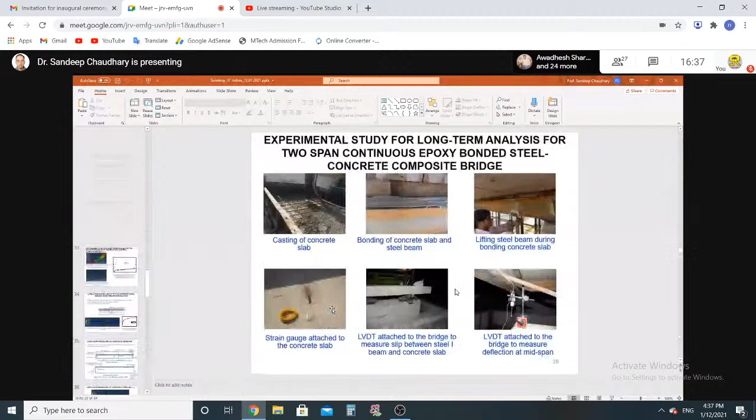So in the middle portion there's a higher second moment of area, or higher flexural rigidity, whereas the other portions have lower flexural rigidity. So we have to deal with three different sections, with three different types of flexural rigidities, and that leads to an iterative process.

So the only thing is, codes normally say that either you can find out these values of XA, XB, the crack length subjectively, or you can assume like 10 to 15% of the portion to be cracked, like in Johnson's book and Eurocode it is given. But that's an approximate method. If you are going for accurate analysis, there's no way out.

You have to go for an iterative method only, because initially you don't know what is going to crack. So initially you have to assume everything to be uncracked. Then you'll get a crack length, then you'll model it in three parts, then you'll get another crack length. So it will be sort of an iterative process.

And I have one more question regarding the cambering. One is heat cambering and another is cold cambering. So in cold cambering, we have applied some force with the help of a jack, and after that force it bends, the beam bends.

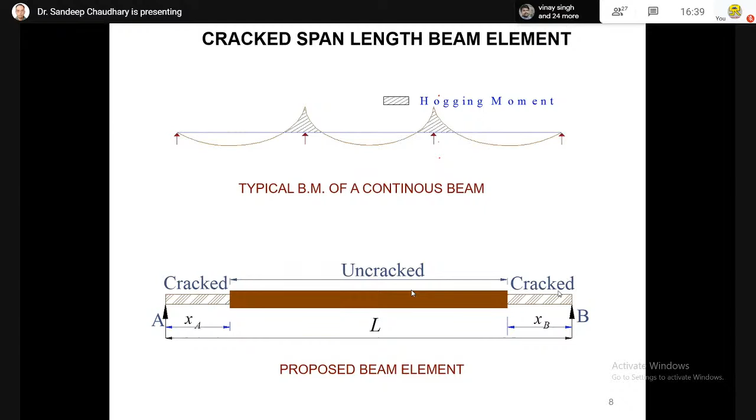No, that's why actually it's not that simple. You have to apply that in a particular manner. It's not that load is being applied at one location only. You have to apply the load from multiple locations, and you have to apply the load in such a manner that only that part is going into inelastic range where you are wishing. So it's not just one set of load; it is multiple sets of loads which you are applying.

Okay, sir. Any other question? Because for the maximum cambering, gradually we are applying the load along the length. Because the maximum bending moment will also occur at the mid span, and that again makes the material weaker in the longitudinal direction.

There's a bit of difference here. It's just that the load is not being applied at one location. There are different positions where, in different manner, load is being applied. So maybe some portions will be kept in such a manner that they're completely unaffected by the load, because it's sort of like fixity in certain portions, and at those particular locations only that type of deformation will be ensured.

It's not just a load from a single location. So it means applying it in a specialized manner. Any other question? For me, it is okay, sir.

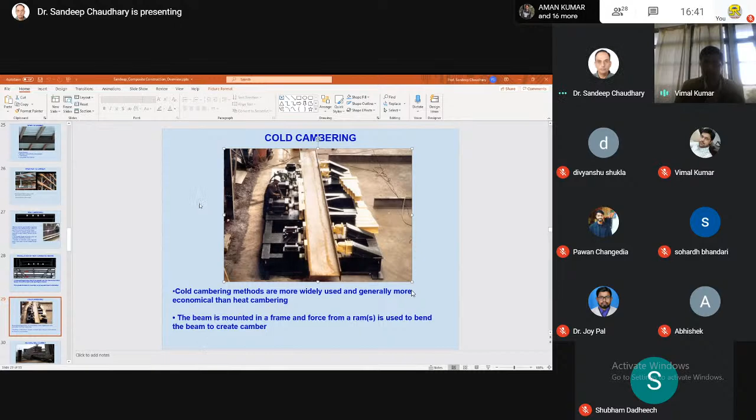So, if you have some doubt in future, I think you can drop a mail to me also. And I hope that it will inspire at least a couple of participants to start research in this area. Yes, definitely, it's an area to work upon. There's ample opportunity for research abroad also, because a lot is going on there as well.